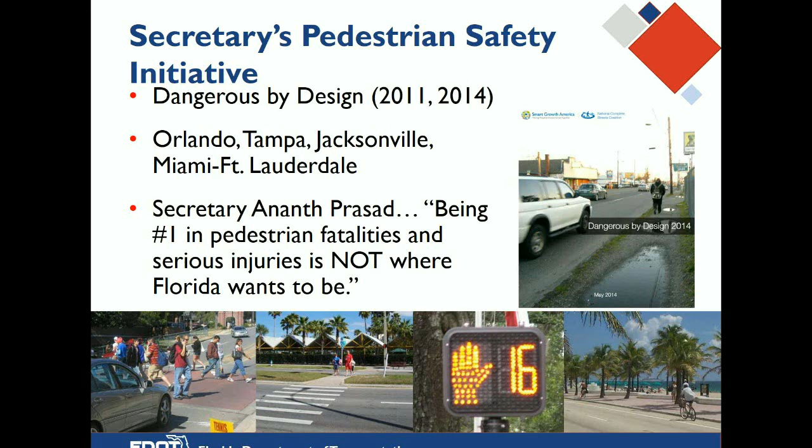When Billy first came over to DOT, our secretary was a man named Ananth Prasad. At that same time, the dangerous by design reports came out, and a lot of folks on the webinar have probably heard of those. There's been a couple that came out recently, and one of the things pointed out was that Florida has, and has really had for many years, an unenviable position as being one of the worst states for bicyclist and pedestrian fatalities in terms of our rate per thousand population. The secretary at the time said that's not where we want to be in Florida. We don't want to be number one on this particular list. So he gave Billy a whole list of things when he brought him in to try to change this, a whole bunch of things he wanted to do, and one of those was to put together a complete streets policy. We'll talk a little more about how that all kind of played out.

Here's just some statistics. The problem is intractable. It's one we've been working on for many years. Even with Billy here, we did a lot of education and enforcement. The piece that's taken the longest to get running is the engineering side of it. Engineering is not something you can run out and change overnight, but it is something we realized needed to be done.

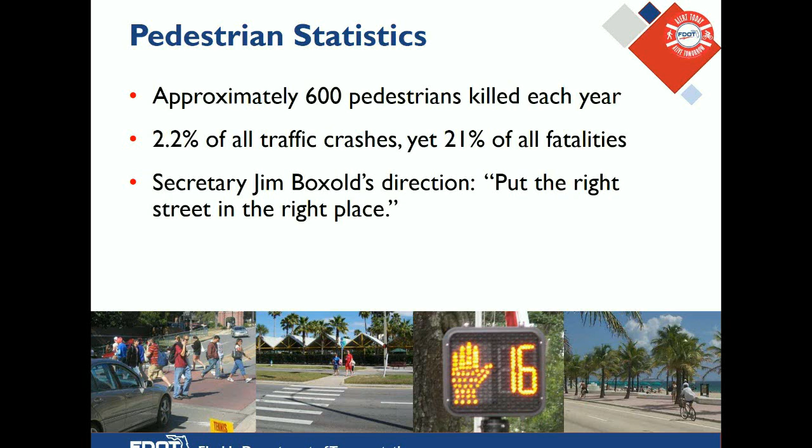The secretary who came in after Secretary Prasad was Jim Boxold, and Secretary Boxold put it very plain and simple. He said, we've got to put the right street in the right place. We've got to make our streets match the places where they're found if we want to solve this problem. That's exactly what we were trying to do with complete streets, and that's where we've been headed with it.

The approach called complete streets, which we call putting the right road in the right place, had already been adopted by about 60 different cities and counties and MPOs in different places in Florida. This is one of the reasons we had to do it at DOT, frankly, because all our other cities and counties were doing it already. When we came to work there, they had these complete streets design parameters they wanted to use. They didn't match with what we were doing. We were still using highway parameters from the 60s and 70s sometimes that were all about speed and moving automobiles. So we really had a mismatch between what our state DOT was trying to offer and what our cities and counties needed to see.

They understood something we've come to understand as well, which is that this is, yes, a safety issue, but it's also an economic development issue. It's a quality of life issue. All those things come into play in cities and towns, and that's why you see so many of them have already adopted these things. That's why DOT needs to get on board with it as well.

It also talks about having a context-sensitive system of complete streets. When we wrote this, from our other experience, we realized you really can't talk about complete streets unless you're talking about the place where the street is found. So you have to understand the place-making potential of this and the ability of the place to define how that street's going to function and whether or not it's going to be a complete street. So we wanted to put that in our policy.

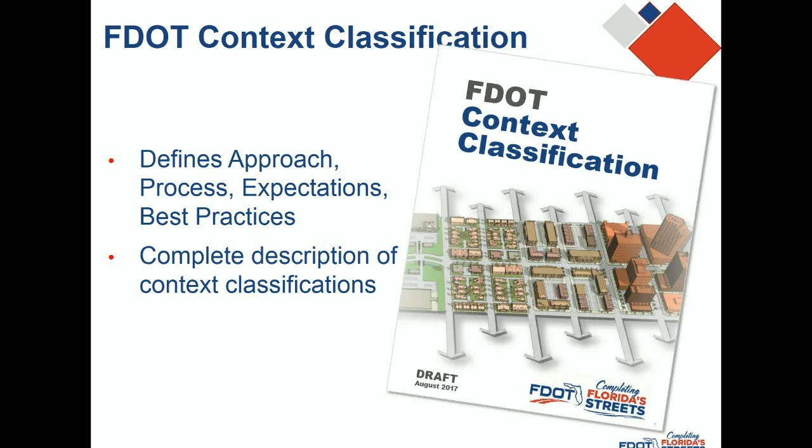You can go to our website at flcompletestreets.com if you want a more in-depth look at our context classification system, but I'm going to breeze through it here today. Basically, it allows us to define place so that we know what kind of street would go into that place. That's in our context classification document, which is on our website.

Once we had our place defined, we were able to update our design criteria, and we now have a new manual, the FDOT design manual. It replaces what we've been using for the last 20 or 30 years, and this new design manual is context-based. So under the new manual, if you want to know how to build a roadway or make an improvement of some kind, the first thing you do is say, well, what context am I in? And that will tell you what criteria to use to build that particular thing.

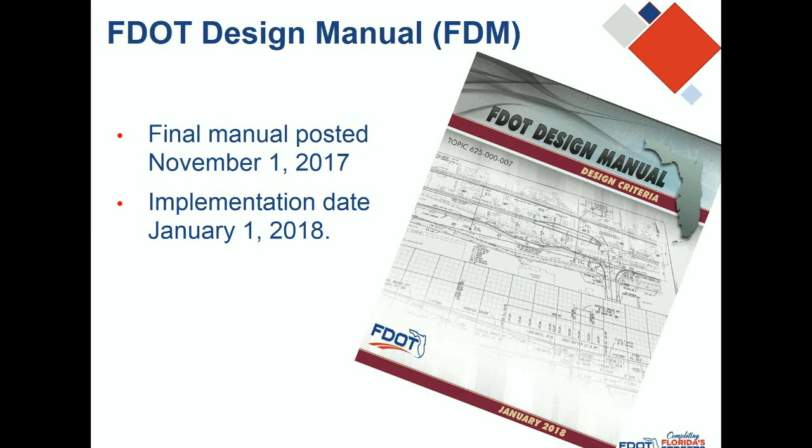They go from the most natural conditions you can think of to the most urban conditions you can think of. And in case you hadn't smelled it on us already, Billy and I were new urbanists in our previous work, and still are, at heart at least, even though we work for governments.

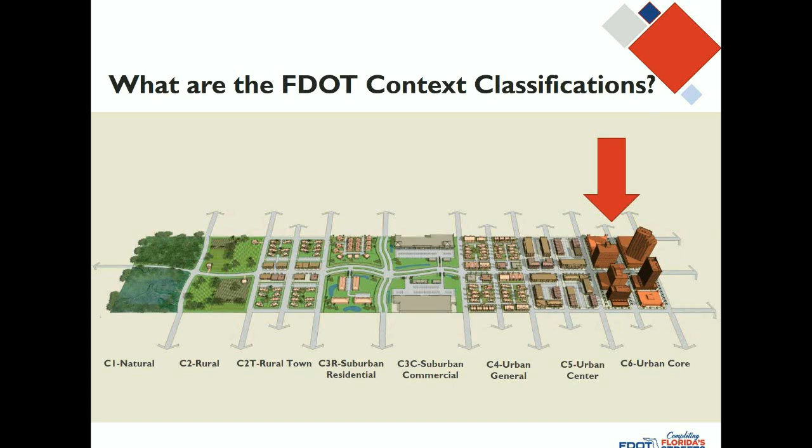This looks a lot like the new urbanist transect system. And yes, we borrowed heavily from that, but the idea of organizing space on this continuum made a lot of sense. It was already pretty well accepted in planning practice, so we found this was actually an easier sell than we thought, even at a place like the Department of Transportation, which wasn't that familiar with it.

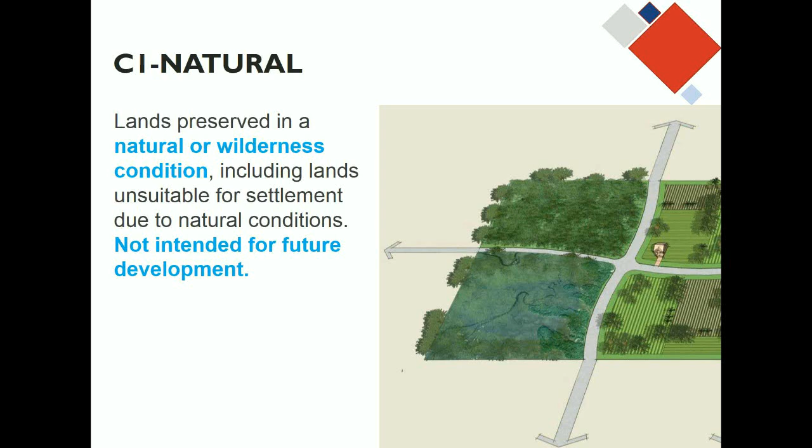I'm going to go through very quickly what our context classifications look like, in case you haven't seen them before. The natural condition we have here in Florida includes places like state parks and national forests. These are preserved and will never be built on, so that's important from a planning perspective. If it's natural today, it will be natural in the future—we can assume it's going to stay that way. It has its own context classification, C1.

As you get to a more urban condition, we have rural conditions—places that may not be built on today, but may be tomorrow, because they're in a reserve location where they could be urbanized at some point. In Florida, if it's farmland today, in 20 years it may not be farmland. So it's important to distinguish between what's empty today and will always be empty versus what's empty today and could be a shopping center tomorrow. We wanted this distinction to be clear in our land context.

This also came out of the NCHRP study that helped us formulate some of this: the concept of a rural town. Many states may have this problem where a small town, surrounded by so much empty space, gets looked at by the census and the density figures don't make it look urban—it just looks rural. Our design criteria in the past didn't have a good way to recognize that in the middle of the countryside there's a little hamlet or village, and we tended to treat it like everything else. Now we have a new way to recognize that with this rural town classification.

We wanted to recognize that, and it was very well received by our planners and engineers here at the department. They had known for years this was an issue and had taken heroic measures in some cases to preserve these little towns, the parking, and that kind of thing. This approach let them feel like they could do that more easily.

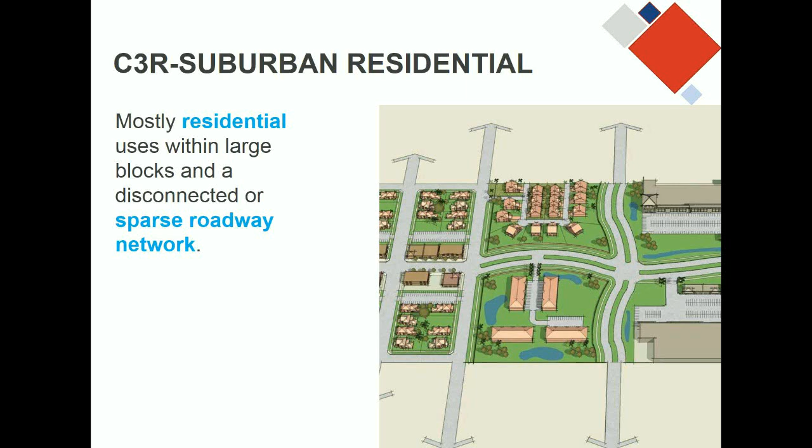As opposed to its cousin, suburban commercial. Suburban commercial development has similar transportation characteristics—large blocks, not very walkable—but because it's commercial, the blocks tend to be more likely in single ownership, like a shopping center. These are actually not that difficult to redevelop.

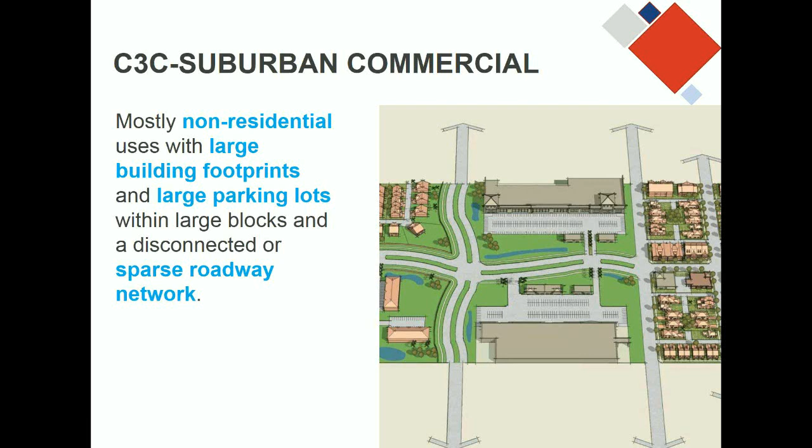There's a whole little industry that goes out and redevelops old shopping centers into town centers, which is good for us because when you redevelop these areas, you can tear this down and create new streets and new grids of network, which is terrific from a state roads perspective. Instead of having to carry all the traffic on our own state road, we can let some of that traffic circulate off of our system, which gives us more flexibility and more room to go for other modes. So it's important to understand there's a distinction between the commercial and residential flavors of suburbia on our system.

Now, as you move into more urban conditions, this is what we all really like. These are the good walkable places. Most of these places were built before World War II, these urban general locations. They have smaller lots, they're walkable, they may have alleys. We don't have a lot of alley-loaded product in Florida, but we do have some, especially in newer communities. But you see they have a good grid of streets, a good network.

So our state road here, if this is in the middle of the state road, does not necessarily have to do all the work itself. A lot of the local trips can be handled on the local street grid, which gives us a lot more flexibility for what we can do here. We have a lot of this in Florida as well. We have some really great towns and cities in Florida, and a lot of them have this kind of development. This makes it easier for us to recognize where those are, and we can treat them differently with our criteria.

And one of the things that makes that possible is that we have this network called backage roads, basically a network of streets off of our main arterial road that allows us to have these other transportation options on our road.

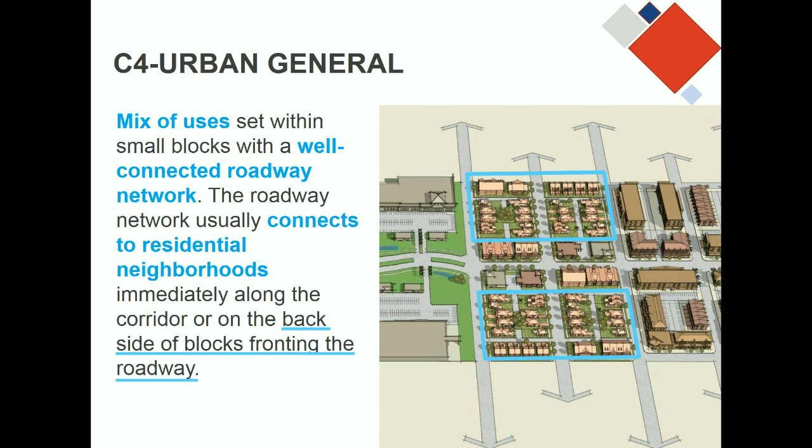So moving on up, every town has an urban center, and in the urban center the buildings are going to be tallest, and they're going to be up to the street. You'll usually have parking internal to the lot, and you always have on-street parking. So now we have a way to recognize where these places are as well, and they have very specific types of transportation needs and design criteria. Now that we know where they are and what that place is, we can design roads to match them.

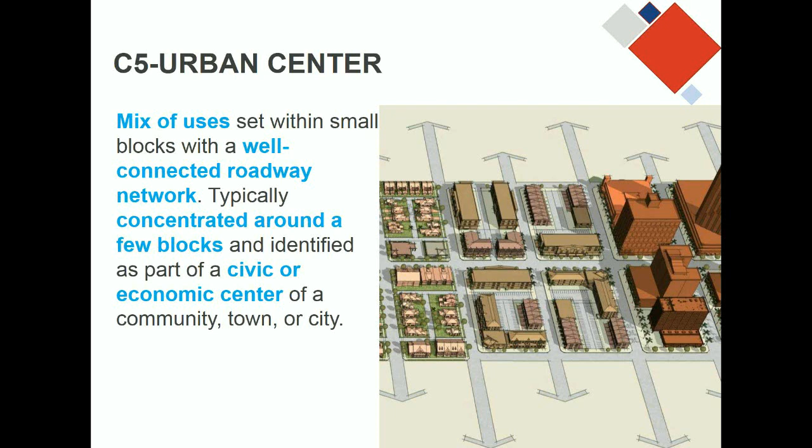And there are a few places in Florida that actually have our very most urban conditions: downtown Orlando, downtown Tampa, Jacksonville, places like that. Those are urban core conditions where you have the very highest buildings, are regionally significant, and we have a few places like that in Florida. Those also have some unique design considerations, and so we wanted to recognize that as well.

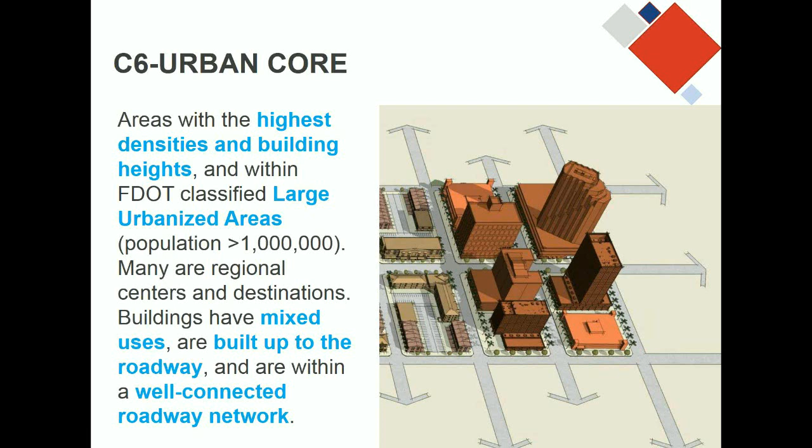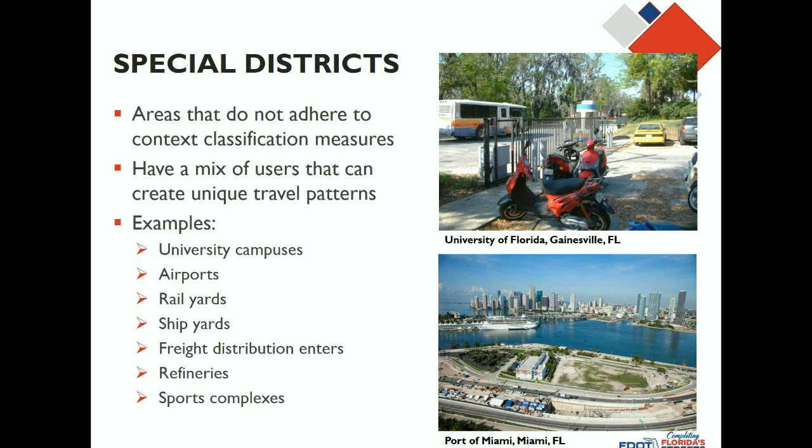So by the time we got all this put together, we realized that there were a few places that were not going to fit on that continuum, and so we recognized there's a need for special districts. These are places that maybe don't fit into a particular context classification. The best examples are things like university campuses, airports, shipping facilities, ports, things that have very unique transportation needs, and it doesn't really make sense to think of them as pure walkable places. So we know those are there, and we have those set aside in our system as well.

Now, as I mentioned before, we kind of borrowed this from the New Urbanists, but at the same time there was an NCHRP study going on for AASHTO, the American Association of State Highway Transportation Officials, to redo the way AASHTO looks at context. They were coming up with a system as well, and theirs was a little simpler than ours. They had, over here, their context zone: rural, town, suburban, urban. And we broke it out a little further than they did.

We broke our rural into 2 categories. As I said, we broke our suburban into 2 categories, and we actually split our urban into 2 different categories as well. So when you look at our design criteria, some of these are collapsed back down, but from a planning perspective, we thought it was important to have all these in Florida. This is a lot of categories, and who knows, in 5 years they may come back and look at it and decide we really don't need the C5, C6, or maybe we can break the suburban back down.

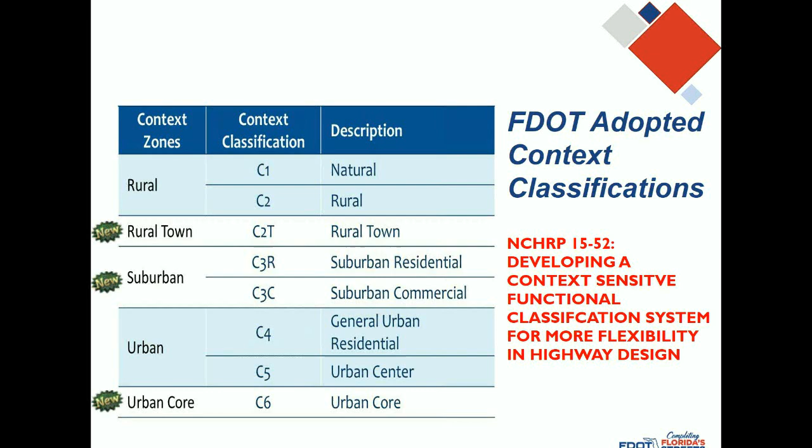I don't know, but this seems to be the best way to approach it so far, and so far it seems to be working.

The reason we need to know this context classification is it helps us know what kinds of users we're going to have and what kinds of things we can plan for along this continuum of uses.

For example, if I'm in C4, C5, or C6, I know I'm going to have pedestrians there. Those are my most urban locations. That's where pedestrians thrive. If you're going to find them anywhere, those are the places you're going to have them.

So if I'm doing work in those areas, I really don't need to go out and do a study or a count to see if there are any pedestrians there. I can just assume they're going to be in my town center and act as if they're there and make all my decisions based on that. So it's not necessarily needed to go out and do pedestrian counts in those kinds of locations. I know that's where they're going to be.

On the other hand, if I'm at the other end of the line in a natural condition, there may be some pedestrians there, but I'm not going to put them on sidewalks, because in those conditions pedestrians are found on trails and paths and things like this. So my designs are different depending on what end of the spectrum I'm in and which context I'm in.

Same kind of thing for accommodating cyclists: in a C6 urban core, I might need a cycle track or bike lanes. In a rural condition, all you may need is a paved shoulder. In a natural condition, maybe I would have a separated shared use path, something like that. I would have different types of designs based on where I am.

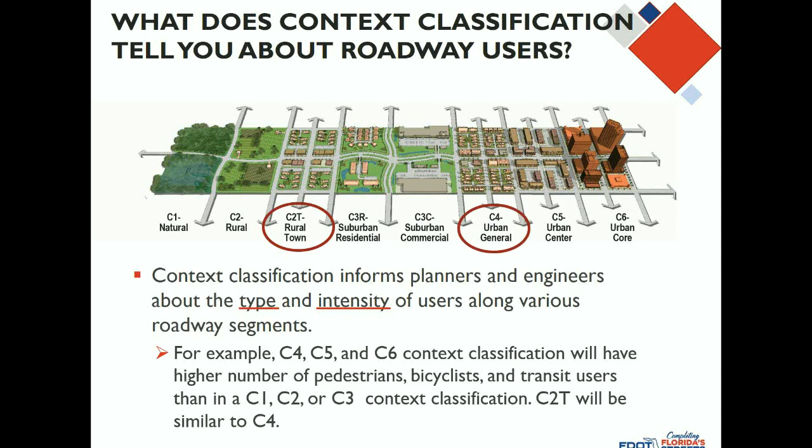C2T and C4 are actually very similar, so our design criteria for those two end up being the same. So let's talk a little bit about what those criteria look like.

Our FDOT design manual, which we lovingly call the FDM, has a few changes in it from what our old manual had, so I'll give you some of the flavor of this. For instance, our old manual for on-street parking basically said, if there's on-street parking, try to get rid of it. And if you have to have on-street parking, try to make the parking lanes 11 feet wide so that when you do get rid of them later, you can use that as a travel lane.

That's really kind of what is said in there about what to do with on-street parking. Our new version, because we now can be more specific about where parking is needed, actually says in C2T, C4, C5, C6, if there's no on-street parking, see if you need some. Maybe it would be good to have some in there because you'll need that for speed management. So we actually can support on-street parking because we can be more specific about where it would be.

Same kind of thing with bulb-outs for pedestrian crossings. They were mentioned in the old manual, but not very much - you kind of had to squeeze them in there. Now we say, hey, look and see if you can add some bulb-outs to that.

Street trees are not required, but because we now recognize lower speeds are appropriate in some of these context classifications, this allows us to put the trees closer to the roadway so we can actually envelop the roadway with plantings, for instance. Of course you still have to look at your clear sight triangles and all those things, but we can still move stuff closer to the roadway to allow us to have the speed management that we're looking for in those locations.

We made some changes to the sidewalk width based on where we now expect to have more pedestrians. We don't have to use one-size-fits-all sidewalks everywhere.

Very much all of the Sunbelt cities, and based on what I've seen, even a lot of the suburban areas in the Northeast and out West, as people started migrating from the downtowns, the historic downtowns, all of the suburbs were pretty much created the same way—a focus on moving cars, not providing sidewalks, not providing most of the amenities that we would expect in this day and age.

Thankfully, in Florida, we did start requiring sidewalks and bike facilities back in the 90s when I was the state roadway design engineer. But we still have a lot of corridors, and this happens to be one near the University of South Florida campus, where I took a picture of this young lady walking her twins because there were no sidewalks. Even though this was adjacent to the campus, there are sidewalks now, thankfully. So certainly those of us in the transportation industry played a role in us getting here.

But as DeWayne mentioned earlier, in Florida and in most of the states that I worked, local governments have total control of the land development patterns that have been created primarily since World War II, that were both a separation of uses and everything basically cul-de-sac, as I put it, onto the arterial road, whether it's a U.S. or a state highway system.

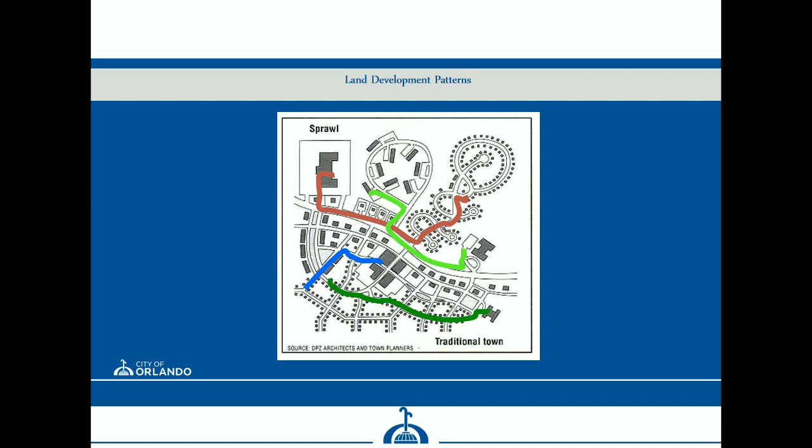And prior to World War II, when we built in a gridded fashion, like most of our historic cities in Florida, including downtown Orlando and the historic neighborhoods surrounding the downtown, we had a gridded network of streets. We had mixes of uses. And so people will still choose to drive in those conditions, especially in Florida in August, but you have lots of ways to get around, and consequently the road system doesn't have to be quite so large, and the intersections likewise.

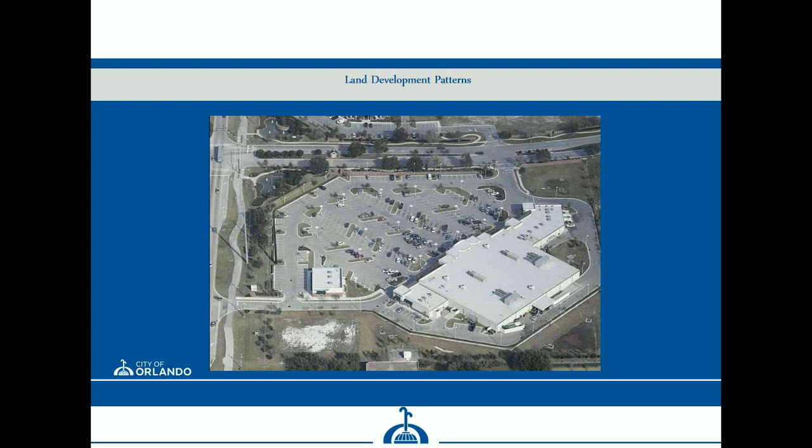In addition to that, one of the challenges that all of us experiencing this kind of growth have faced is this practice of putting large surface parking lots that are not used most of the time, separating the roadway from the retail that people want to get to. You can see in this image there's a very wide side path, which people could use to bicycle or walk, and there's sidewalks, and it's nicely landscaped. But in the vast majority of locations, no one's going to walk in this environment unless they have no other option, because it's not convenient for bicyclists or pedestrians.

Likewise, the lack of connectivity in our land development patterns—and as I've said for many years to local governments, this is a problem that only takes political will to solve, and it actually reduces the operating costs of cities and counties. This happens to be two neighborhoods in Orange County outside the city of Orlando, where the back doors of these homes are only 70 feet apart, physically 70 feet apart, but it's a 7-mile drive. So trash collection, school busing, every service that's provided by government ends up costing more because of this lack of connectivity.

And again, it puts all the trips out onto the arterial system. So those of us in government have a lot of work to do as well.

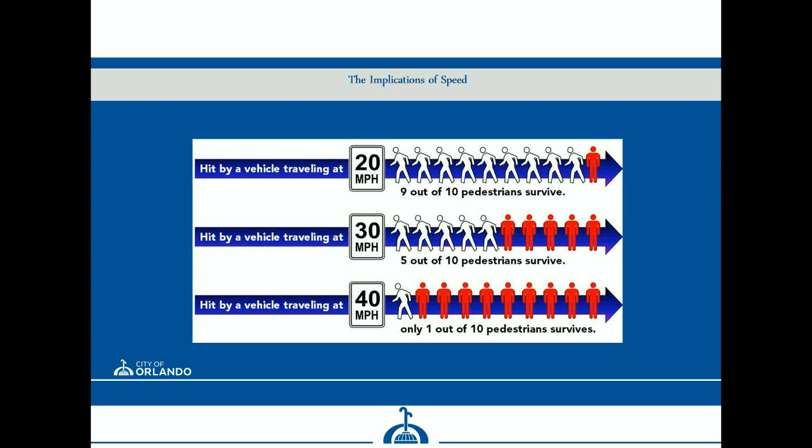One of the challenges that we learned during the safety initiative is the challenge related to fatalities and speed. And we're in the process of becoming a Vision Zero city here in Orlando. Since I've come into the city, we're in the process of joining the Vision Zero network. One of the primary focuses in that is we've got to get the speeds down to reduce the severity of injuries and fatalities. You can see at only 30 miles an hour, your chances of dying goes up to 50%, and at 40, 90% of the people that get hit get killed at or above that speed. Most of our arterials are 40 or above.

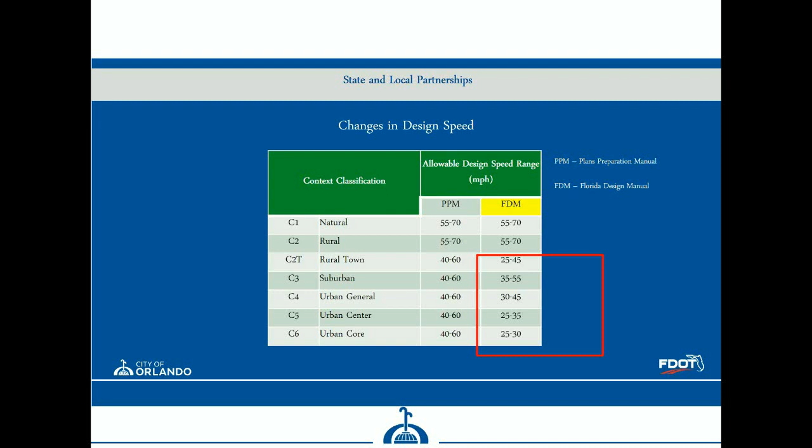This is a huge improvement in terms of our ability to do things differently. One of the things DeWayne mentioned earlier about the Complete Streets policy - I had been working on the safety initiative for about 2 years when we brought DeWayne on board, and I convinced Secretary Prasad at the time that we couldn't continue to design our street systems with a one-size-fits-all approach and expect to solve this safety problem long term. It's not something that can be fixed overnight since we've built so much based on the old criteria, but we have to start somewhere. Thankfully, both him and Jim Boxold supported not just a policy, but the implementation of Complete Streets. Policies are a good start, but if you don't implement them, you can't get there from here.

Likewise, we had minimum lane widths - the old requirements were 11 feet and 12 feet. In most cases 12 feet was used regardless of whether it was urban or rural, as long as there was room for 12-foot travel lanes. Now with the new criteria, travel lane widths as narrow as 10 feet can be used as long as the target speed is in the 25 to 35 mile an hour range. We no longer design a cross section for a speed higher than what we want people to drive - if we want people to drive 25, we design the street and adjacent land development to support those lower speeds. A significant benefit for engineers, who have always been concerned about liability, is that having this in the design manuals lets them do proper design without creating variations or exceptions from AASHTO. This benefits street design, safety, and the professional standing of the engineers doing the work.

Likewise, while minimum sidewalks certainly improve safety, we realized we have to focus not just on safety but comfort. You get that with wider sidewalks and larger setbacks from moving traffic. Before, we basically had either a 5 or 6 foot sidewalk, and the state has always funded and maintained sidewalks. Now, based on the new criteria, sidewalks can be 6, 8, 10, or 12 feet, depending on context. This is hugely important for cities that have been trying for years to get wider sidewalks incorporated, primarily in redevelopment and new development projects like what we're doing here in the city of Orlando.

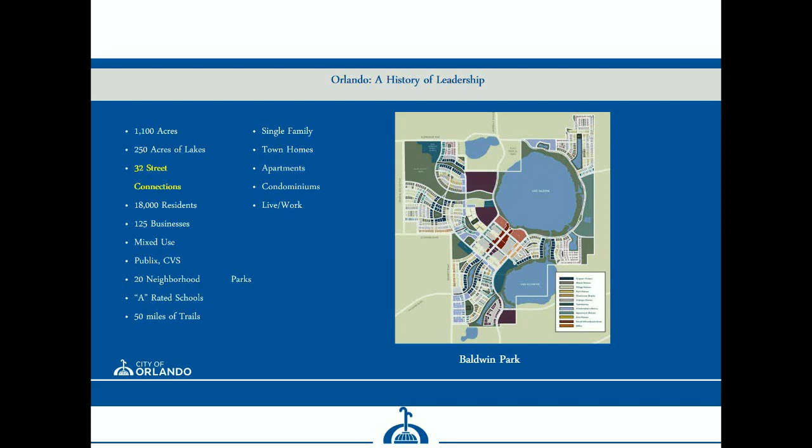One of the reasons I moved to Orlando when I was in the private sector was because the city understood these goals many years ago and developed a project called Baldwin Park. It's about 1,100 acres, used to be a naval training center, and is completely mixed use - a new urban project. It has a densely gridded network of streets, with 32 street connections between Baldwin Park and the adjacent street network. While the adjacent city of Winter Park didn't want these streets connected into their network, the city of Orlando prevailed and created the full grid. You could literally never leave Baldwin Park - it has A-rated schools, grocery stores, all kinds of restaurants and trails, just wonderful facilities. It's where I take everyone to see how projects can be done right. It's not perfect, but it's the best I've seen in the state of Florida.

Likewise, Orlando was one of the early adopters of bringing major chain stores back into downtown. This happens to be the store I pass by as I ride my bike home from work every day - it's a Publix grocery store, our primary chain here. It's the first Publix that wasn't a standalone; it's actually on the ground floor of a condo building and has no surface parking lot. It shares a small underground parking garage with the rest of the retail on this entire block.

As a result of the things that DeWayne has talked about, and as our goals here in the city since I've come on board, the city already had complete streets policy elements in our comprehensive plan, and has been focused on making sure that projects are done properly, especially in the downtown core. We have some suburbs, just like any large city, but in the downtown core and the corridors developing adjacent to downtown, we're expanding those development patterns.

As I mentioned, we're already in the process of becoming a Vision Zero city. We're doing one-way conversion studies. Our main street currently is a one-way street going south, with a companion one-way going north, the segment north of State Road 50, which runs east-west through Orlando. We're doing a study right now to convert that back to two-way, because we know that will help support retail, with the goal to eventually convert all of Orange Avenue into two-way streets.

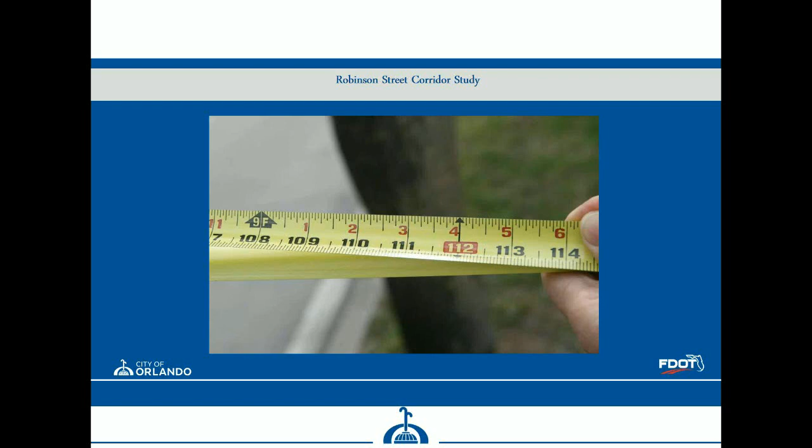While the street is posted at 35, we have people driving, especially during off-peaks as they drive east, 45 and 50 miles an hour through residential neighborhoods. So as we've been talking about, the context of this corridor, even though it's only about 1.5 miles long, changes. Based on the traffic volumes, we're comfortable that we'll be able to do a road diet. It's in concept development phase, which will finish up in the spring, and we'll go into design.

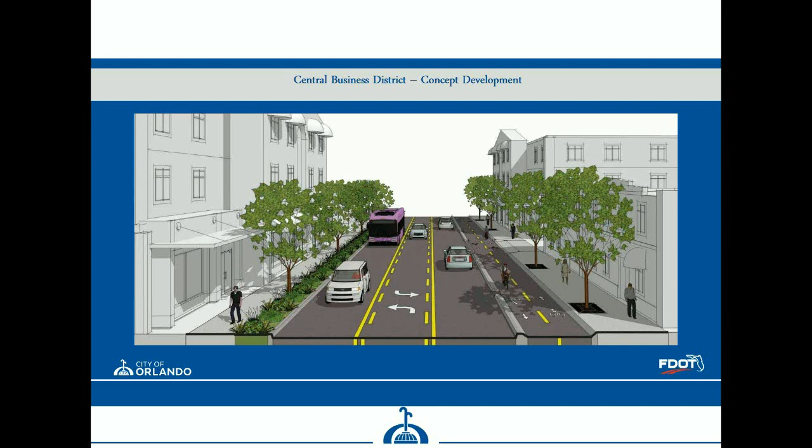We'll be working with the district to make this happen. They actually have a resurfacing project that we're going to take advantage of to do some minor reconstruction. This is the Central Business District, which is a C5 on this block, and you can see we've proposed a cycle track on the south side that will go over into the neighborhood west of Interstate 4. In this case, it shows a bidirectional turn lane.

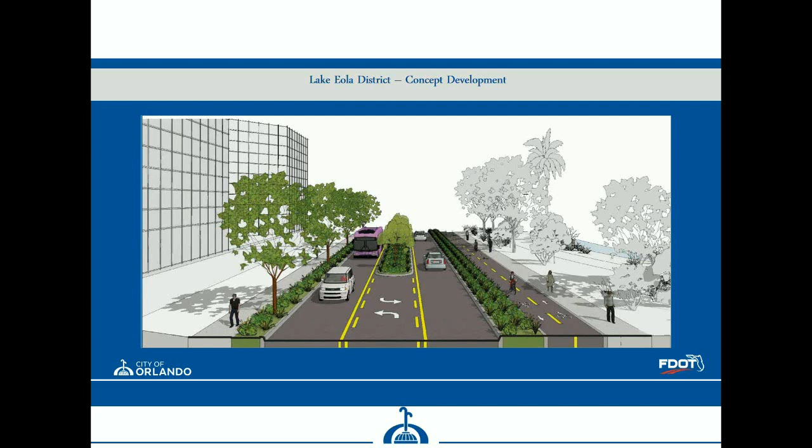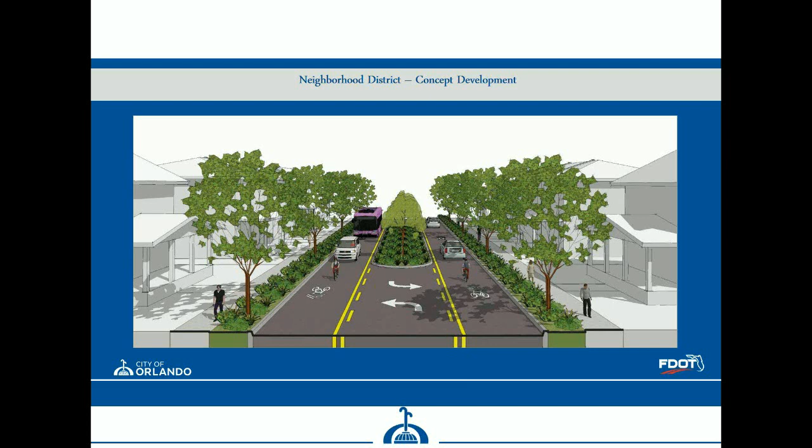Then the neighborhood district has a mixture of homes, both multifamily and single family, and homes that have become small offices. So this is more like a C4 district, and again, the medians allow for crossings and improve the landscaping. And then finally, we go into the Milk District, which is actually an industrial district. It used to be, well, it still is a dairy, which is why it's called the Milk District.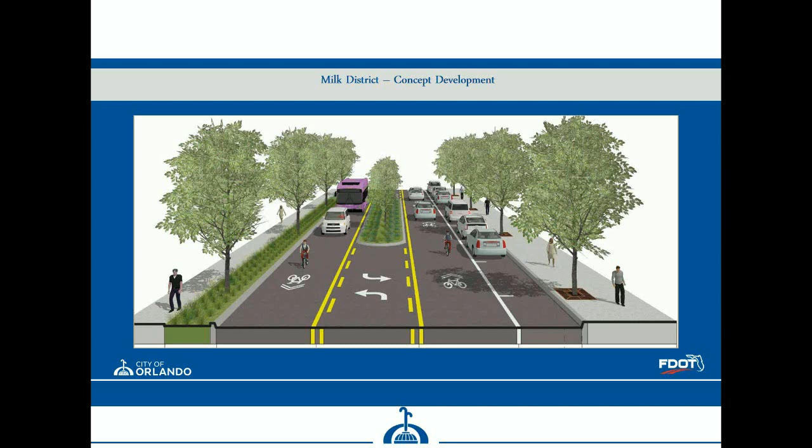We have a lot of retail and commercial buildings on the south side, the right side as you're looking at this photo. We don't have any permanent parking there, and this district is starting to redevelop fairly rapidly. It's one of our 10 Main Street districts, so we need to provide on-street parking on that side. You can see there are sharrows in the lanes. We're looking, potentially over time as the dairy redevelops, to put a cycle track on that side of the roadway.

So a lot of things happening here in the city of Orlando. Thankfully, the direction the department has gone helps support Robinson Street, because it is a state road. And with that, Robbie, I'm finished with my segment.